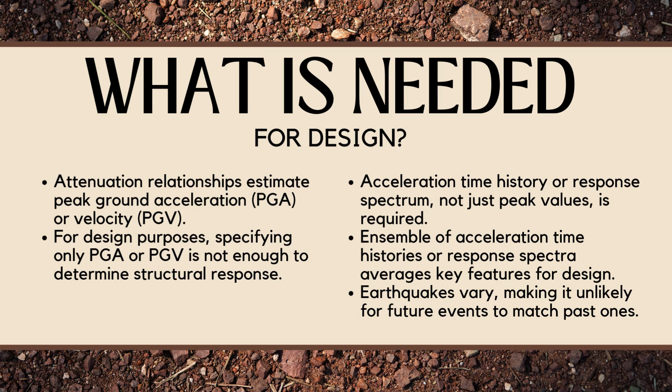Response spectrum is a tool that shows how a structure will respond to different frequencies of ground shaking. So kinakapture nito kung gaano ma-vibrate yung isang building under various shaking intensities or frequencies. So, imagine mo yung swing sa isang playground. If you push it gently, syempre, it will move back and forth slowly lang din. Kapag naman mas napalakas or mas napabilis, syempre, gagalaw yung swing ng mas mabilis and with more force.

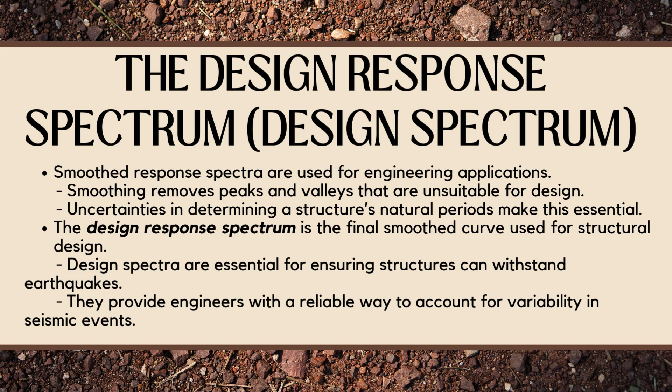So after ma-smooth out ang response spectrum, ang smoothed curve na ito, yun na yung tinatawag natin na design response spectrum. So, yung design response spectrum, siya na yung smoothed and simplified curve na ginagamit ng mga engineers for designing earthquake-resistant buildings. Ini-ensure ng design spectrum na masasurvive ng building ang various types of shaking, from slow vibrations to fast violent movements. So, ngayon alam na natin ang importance ng design spectrum.

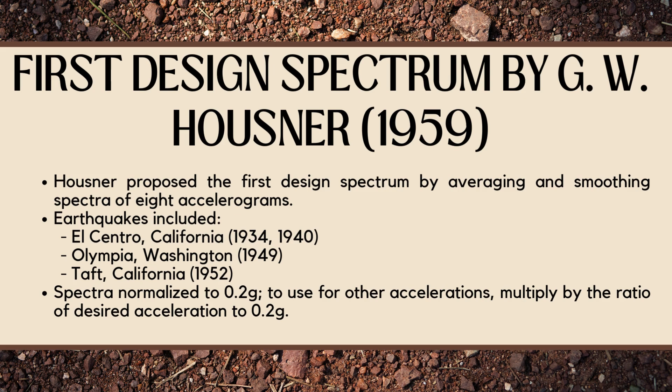Dumako naman tayo kung paano na-develop ang unang design spectrum. So, noong 1959, George W. Housner created the first design response spectrum. Ginawa niya ito by averaging the response spectra from 8 different earthquakes, including the major ones in California and Washington. Dahil sa ginawa niya nakapagpasimplify sa complex data na nakakatulong naman ngayon sa mga engineers, naging groundbreaking ito.

Over the years, marami pang methods ang na-develop to create design spectrum. Ilan lamang ang mga sumusunod sa mga main methods na ginagamit ng mga engineer ngayon. Method 1 is using a specified peak ground acceleration in a typical response spectrum shape. Method 2 is the Newmark and Hall method, which became a widely accepted approach. Method 3 is using statistical correlations to directly calculate average response spectrum from multiple earthquake records.

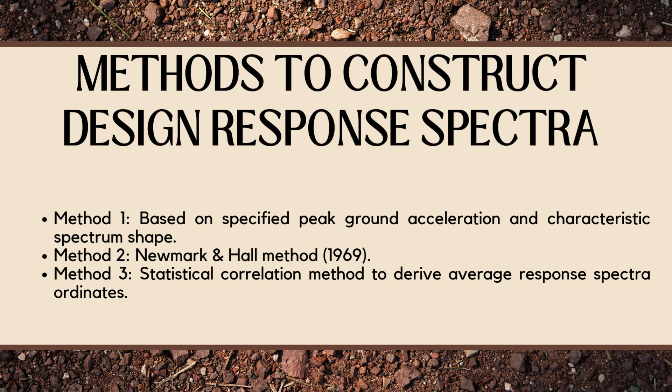So, in creating response spectrum for earthquake-resistant design, ang tatlong method na ito ang nagpo-provide ng needed data. At mas i-explore pa natin ito in more detail throughout the discussion, so you can see how they help in designing safer buildings. The elastic response spectrum is a graph that illustrates the peak response, acceleration, velocity, or displacement, of a single degree of freedom or yung tinatawag natin SDOF system, subjected to seismic ground motion.

Next aspect is ground motion. When an earthquake occurs, ground shaking induces forces in the structures. Third aspect is inertia forces. As the ground shakes, the building experiences inertia forces due to its mass. Next is structural behavior. The response can be elastic, where the structure returns to its original position after shaking, or inelastic. Next is damping. Damping mechanisms such as materials and design features help dissipate energy during seismic events.

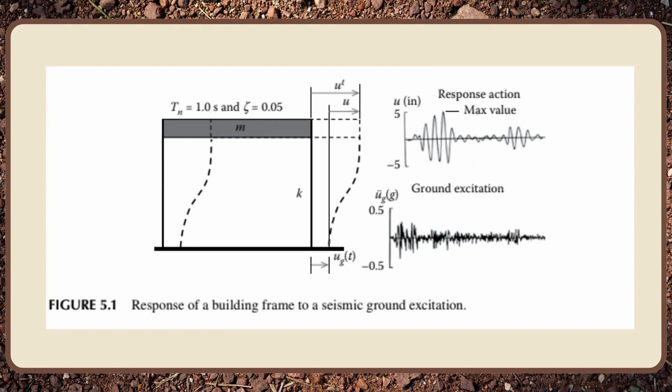Displacement response to seismic ground excitation refers to the movement of a structure as it reacts to the forces generated by an earthquake. Dynamic response: when ground shaking occurs, the structure's mass experiences inertia, resulting in lateral displacement that can vary with the height. Natural frequency: the structure's natural frequency plays a significant role in how it responds. Displacement response is crucial for designing safe buildings that can effectively withstand earthquake forces.

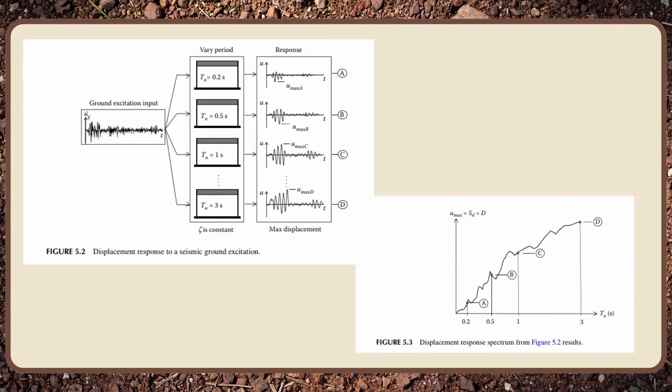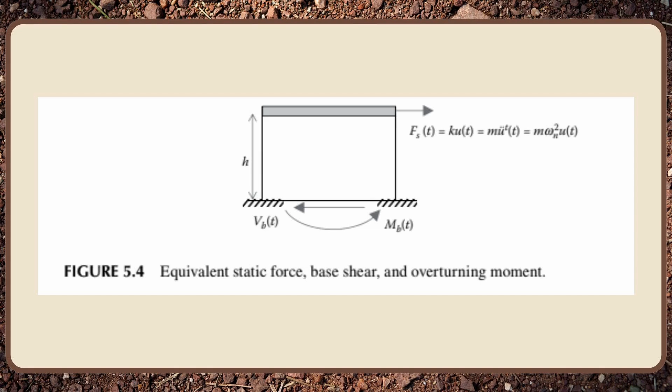Everyone, ngayon naman i-discuss ko yung Elastic Design Response Spectrum. This tool plays a vital role in how we design buildings and other structures to withstand earthquakes, ensuring they remain safe and resilient during seismic events. In this presentation, I'll explain what the Elastic Design Response Spectrum is, how it works, and how engineers use it. Ano ba yung Elastic Design Response Spectrum? It is a graphical representation that shows the maximum response of a single degree of freedom system to a particular ground motion.

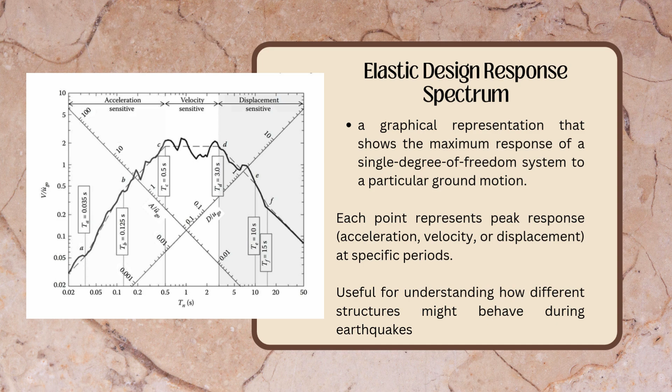The Elastic Design Response Spectrum helps predict how strong... Now let's talk about how this tool actually works. This spectrum is created by applying seismic records from past earthquakes to a range of hypothetical single degree of freedom systems. Gamit yung mga seismic record na yun, nakakabuo ito ng isang spectrum o isang linya that shows how buildings might respond to similar earthquakes in the future.

The elastic design response spectrum is typically focused on three key response types. Una is the acceleration response spectrum. This shows the peak acceleration that structures of various periods would experience, and it's crucial for determining the seismic forces structures need to withstand. Or sa madaling sabi, ito yung nagpapakita on how much force is likely to hit the building. Next is the velocity response spectrum. This reflects the peak velocity, helping us understand the speed of movement within the structure.

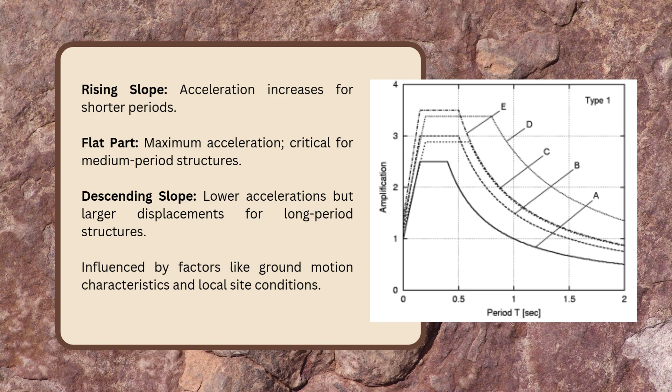We all know na ang basic design objective ng seismic resistant design is to protect the life safety of the building occupants and the general public. Also, to control the severity of damage in small or moderate earthquakes. Kung sa elastic response spectrum, ang expected seismic performance ng building ay mag-resist ng minor and moderate level ng earthquake ground motion.

Ang inelastic response spectrum naman ay kapag ang expected seismic performance ng building ay nagre-resist na ng major level of earthquake ground motion, na ang intensity ay equal daw sa strongest either experienced or forecast for the building site without collapse, but possible daw na merong some structural or non-structural damage. Kailangan daw natin ang inelastic response spectrum to calculate the inelastic strength demand which should be given to our structure for a desired level of ductility.

Newmark and Hall also developed a procedure for accounting for inelastic behavior in a structural system response due to an earthquake, an inelastic response spectrum. To simplify the analysis, they assume the behavior of a structure to be elastic-perfectly plastic. This assumption yields a relatively accurate result and was also used to develop the inelastic design response spectrum. In this case, we solve the following nonlinear equation of motion.

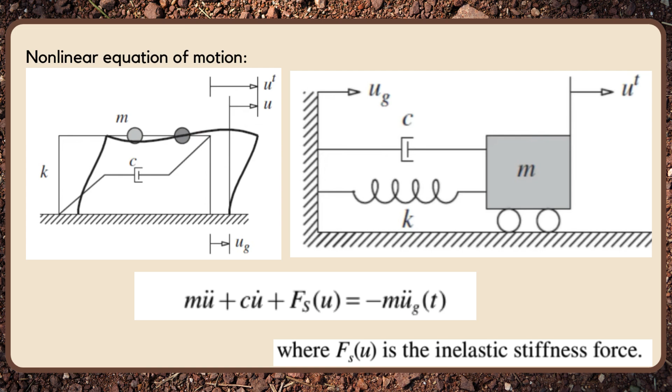Next is the ductility ratio. All other parameters are the same as for elastic system. The solution to the system requires numerical integration of the equation, and the result can be presented in the same fashion as those for the elastic case, with one major difference: the ductility of the system, which is defined in terms of the ductility ratio. This parameter is defined as

ductility ratio is equal to the maximum displacement of the system, which is U sub m, over yield displacement, which is U sub y, or U sub m is equal to ductility times U sub y. In other words, mini-measure daw nito kung how much the system can deform bago niya ma-reach yung ultimate capacity.

The yield displacement or the U sub y is the displacement at which the system begins to behave non-linearly. It is typically determined by the yield strength of the materials. And the ductility ratio is an important parameter for designing structures that are subjected to seismic loads. It is used to ensure the structure can withstand the expected seismic force without collapsing. A high ductility ratio indicates that the structure is more resistant to damage.

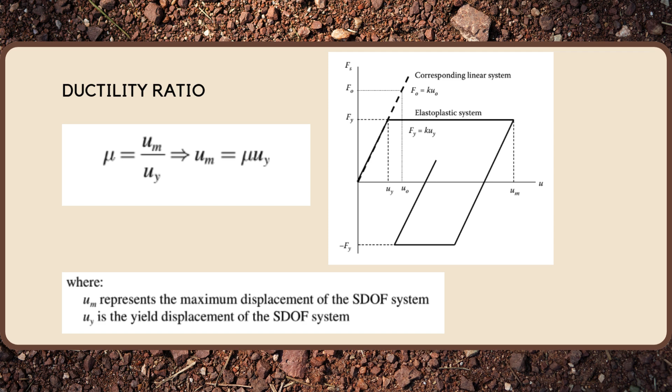We can also define a parameter based on the fictitious corresponding linear system and the yield force, known as the yield strength reduction factor Ry. Ry is equal to F sub o over F sub y, equals K, which is the stiffness, U sub o over K U sub y. Then, cancel natin tong K, kaya magkakaroon tayo ng U sub o over U sub y. And U sub o represents the maximum displacement of the corresponding linear elastic system.

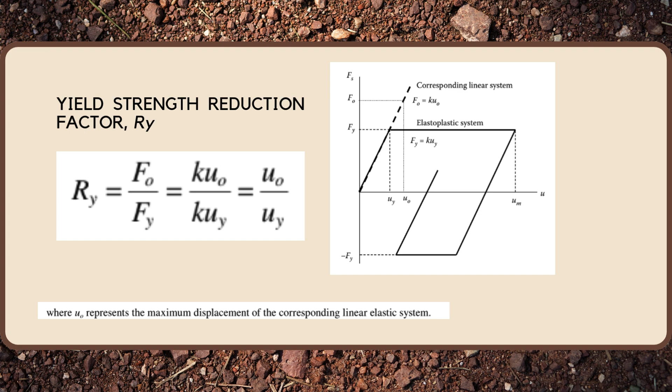In addition to ductility, we can define a second displacement ratio between maximum displacement U sub m and the maximum displacement of the fictitious corresponding linear system U sub o, which relates R sub y and ductility. So, dito is U sub m over U sub o is equal to U sub m over U sub o times U sub y over U sub y, equal sa ductility times U sub y over U sub o, or equal din sa ductility over Ry.

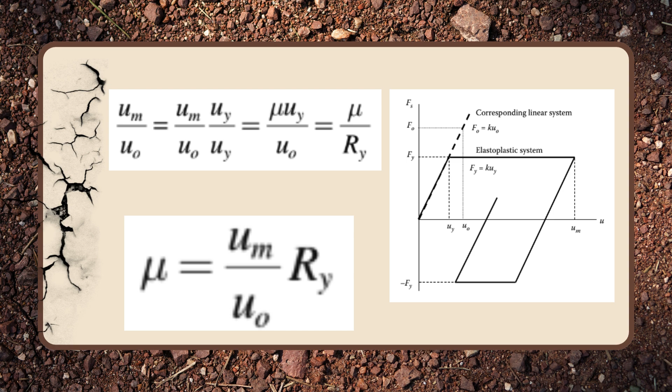Furthermore, to increase system earthquake resistance, it can be designed by either making it strong or ductile, or a combination of the two, because increasing ductility greatly decreases response. In conclusion, while ductility is often considered a primary strategy for earthquake resistance, damping can play a valuable role, especially when combined with other design measures. The optimal approach will depend on a variety of factors, including the specific characteristics of the structure and the seismic hazard.

Given yield displacement U sub y, the relationship between elastic and inelastic quantities are as follows. D sub y is equal to U sub y, which is the yield displacement. Vy is the pseudo-velocity, which is omega n times yield displacement. Ay is the pseudo-acceleration, omega n squared times yield displacement. And ang omega n squared daw natin dito is equal siya sa (2 pi over Tn) squared.

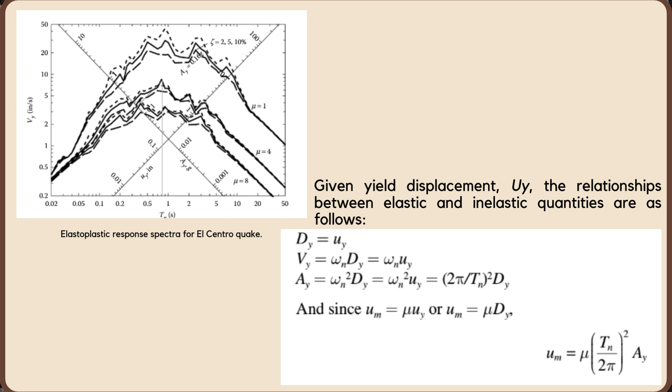And since yung mga nauna natin na formula is U sub m is equal to ductility times U sub y, or U sub m is equal to ductility times D sub y, magkakaroon tayo ng another formula na U sub m, or the maximum displacement, is equal to ductility times (T sub n over 2 pi) squared times pseudo-acceleration. Yung mga structure ay dinedesign considering yung capacity nun to resist inelastic deformation. So, kailangan natin ng inelastic design spectra sa pagde-design.

So, sa elastic design response spectrum, gumagamit tayo ng backbone ng peak ground properties and ina-adjust yung mga values na yun gamit yung amplification factor. Sa inelastic design response spectrum naman, gumagawa tayo ng new backbone ng elastic spectral response properties and bagong set ng adjustment parameters na para sa inelastic behavior.

Yung mga adjustment parameters na yun are functions of system ductility. Magsisimula tayo sa ductility ratio, na equals to the maximum deformation over the yield deformation. Deformation is equals to force over the coefficient of stiffness. Then, cancel yung K, matitira is F sub E over F sub Y.

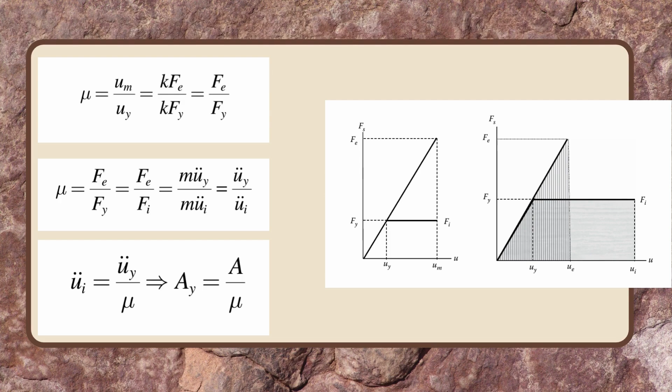Kung makikita natin sa figure sa gilid, Fy is equals to Fi, kaya naging F sub E over F sub I. Then we know that force is equals to mass times acceleration, kaya naging ganyan. Then cancel yung M, ang matitira is acceleration sub Y over acceleration sub I. So dahil dyan, this results sa maximum inelastic acceleration equals sa maximum elastic acceleration divided by the ductility factor.

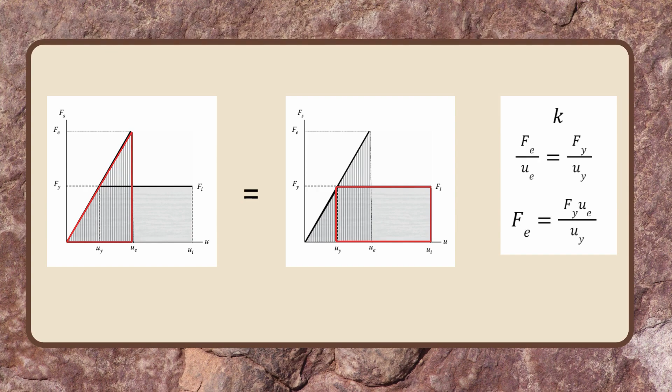Yung equation na nakuha ay para lang sa may constant displacement in region, pero hindi pwede sa constant acceleration region. So para sa constant acceleration region, i-equate natin yung elastic and inelastic. Yung mga susunod na slide ay para lang makuha yung yield deformation. Feel free to pause.

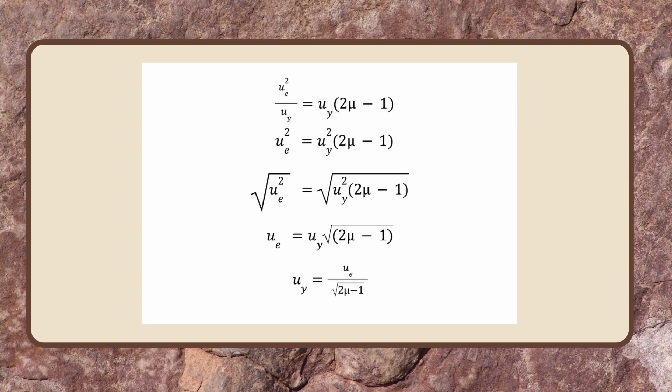Gamit yung nakuha nating yield deformation, makukuha natin yung maximum inelastic deformation. Andyan na yung mga formulas. Ito naman yung mga formulas for the maximum displacement and yung maximum force, or yung required yield strength.

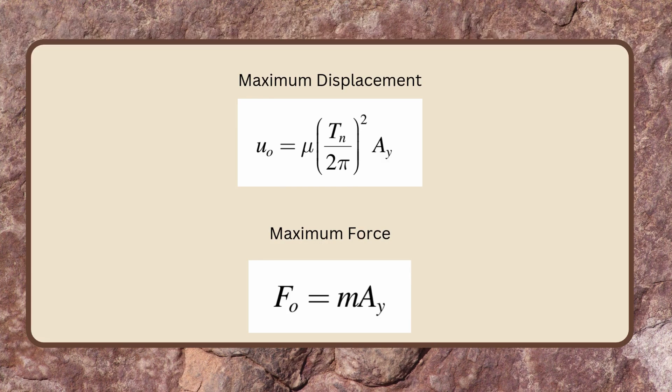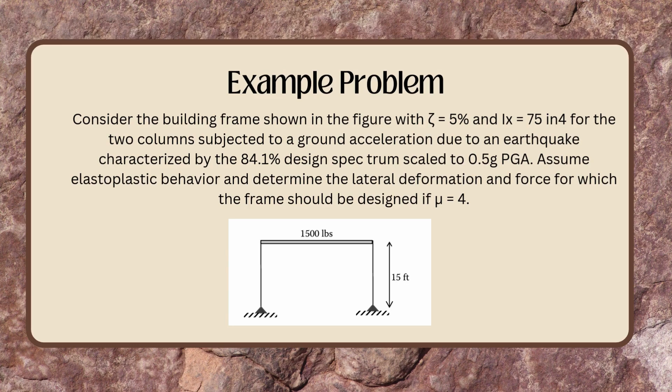Problem: consider the building frame shown in the figure with 5% damping and Ix is equals to 75 inch raised to 4 for the two columns, subjected to a ground acceleration due to an earthquake characterized by the 84.1% design spectrum scaled to 0.5 G PGA. Assume elastoplastic behavior and determine the lateral deformation and force for which the frame should be designed if ductility is equals to 4.

So mahanap mo muna yung mass and stiffness constant. Yung mass is equals to weight over gravitational acceleration. Ang makuha natin is 3.88 pounds second squared per inches.

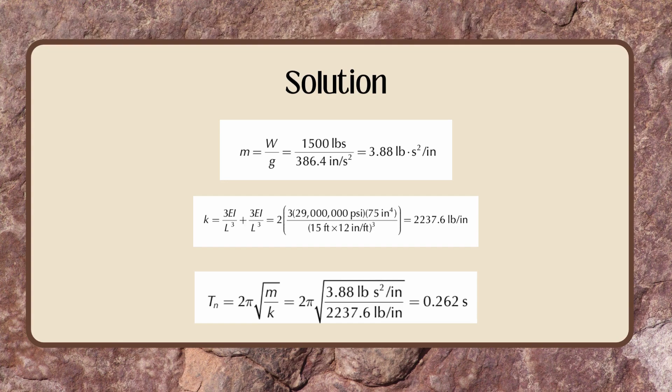Then yung K, yung formula na yan ay kapag yung column ay fixed at hinge. Ang makukuha is 2,237.6 pound per inch. Then makukuha mo na yung natural period of the system, which is 2 pi times square root of m over k. Ang makukuha mo ay 0.262 seconds.

Based sa problem natin ay 84.1% percentile at may 5% damping tayo. So 2.71, 2.3, tas 2.01 lang yung pagpipilian natin. Since yung nakuha nating natural period ay nasa acceleration sensitive region, ang gagamitin natin ay yung 2.71. Times lang natin yung 2.71 na yun dun sa 0.5 G na PGA. Makukuha natin is 1.335 G.

Nakuha natin na yung A, kaya makukuha natin yung maximum displacement. Ang makukuha natin ay 1.353 inches. Since given naman na lahat, makukuha mo na rin yung force na 770 pounds.

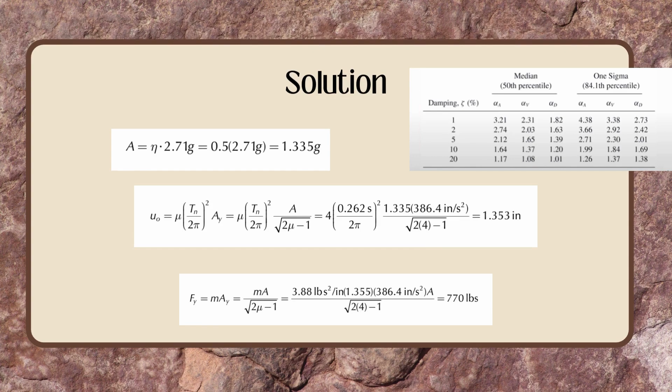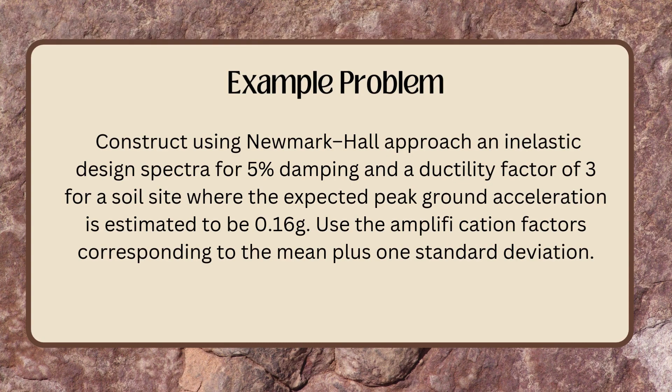Next example problem ay ito na, yung paggawa ng inelastic design spectra. Construct using Newmark-Hall approach an inelastic design spectra for 5% damping and the ductility factor of 3 for a soil site where the expected peak ground acceleration is estimated to be 0.16 G. Use the amplification factors corresponding to the mean plus 1 standard deviation. Dito hanapin natin yung peak ground velocity and displacement.

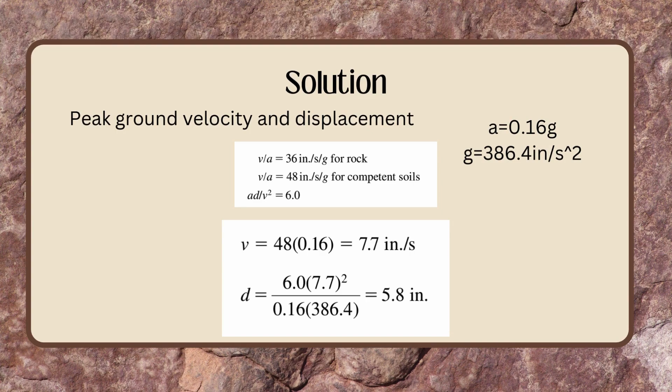May given tayong peak ground acceleration na 0.16 G and yung G natin ay 386.4 inch per second squared. Makukuha natin yung velocity gamit yung V over A is equals to 48 inch per second per G. So 48 times 0.16, makakancel lang naman yung G since may G dito sa taas. So 7.7 inch per second. Sa displacement naman ay yung AD over V squared is equals to 6. So D is equals to 5.8 inches.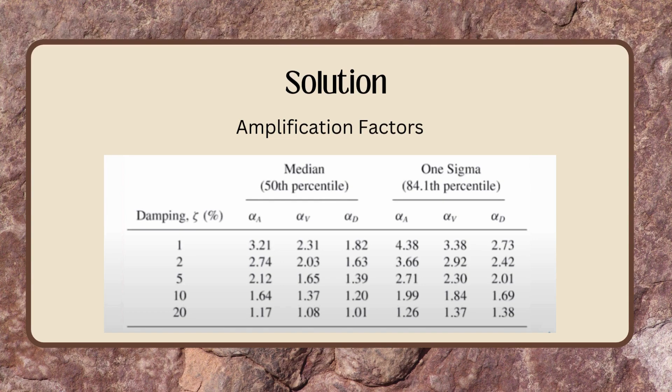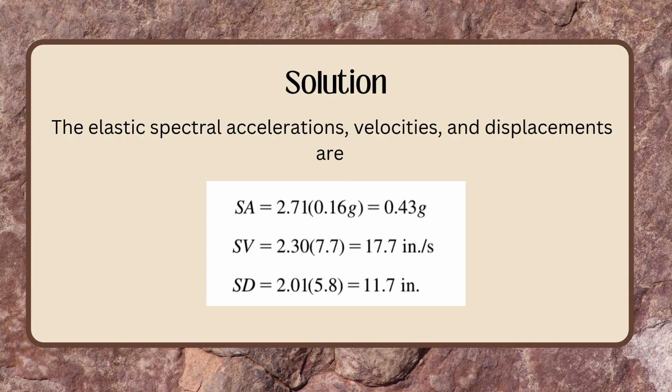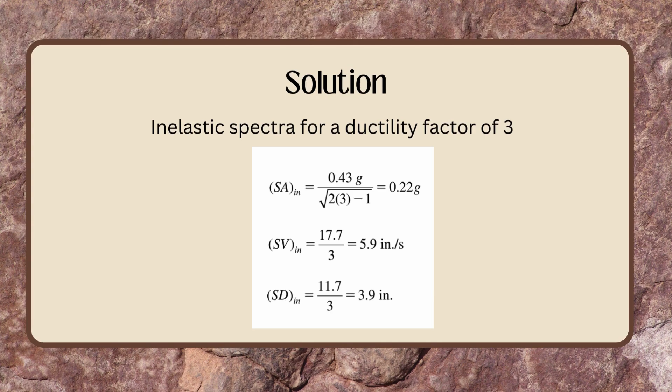Ito na yun, elastic spectral accelerations, velocities, and displacements are yan. Tinimes mo lang yung alpha niya dun sa peak ground. Para makuha mo naman yung inelastic spectra, gagamitin mo lang yung na-derive mo kanina na yield deformation na U sub E over square root of 2 ductility ratio minus 1. Then substitute mo lang. Yan na yung design spectrum ng example problem.